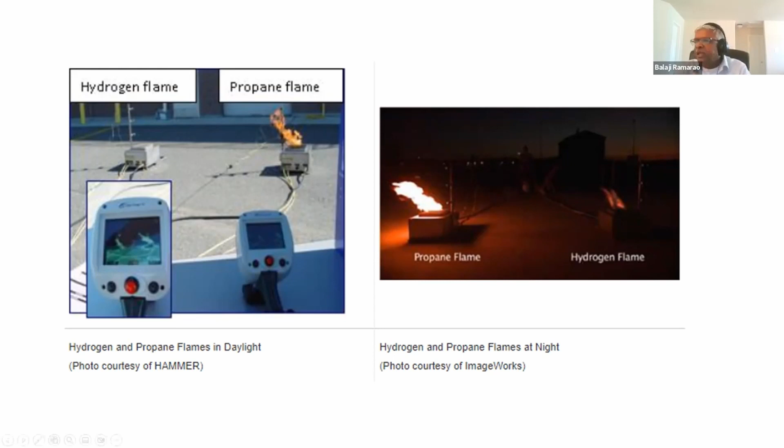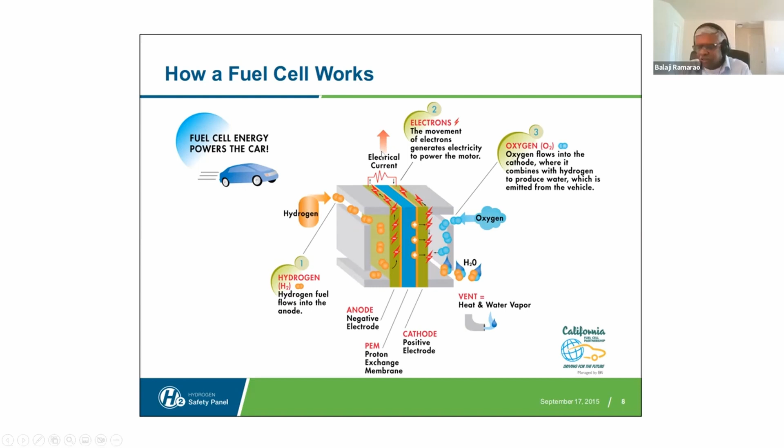I wanted to give an overview of how the fuel cell works for all these hydrogen cars, hydrogen trucks and others. Basically, you have the cell here, you send hydrogen, it combines with oxygen, and you have water. This is the type with the proton exchange membrane, and you generate power between the anodes and the cathodes. Then it converts, and you have the electrical current. Just wanted to give some basics on the fuel cell.

The traditional source of hydrogen was the refineries, because refineries need a lot of hydrogen for processing, especially if they have sulfur compounds. They hydrogenate them, convert that to hydrogen sulfide, and clean those fuels. Then you have the other ones, which are coal and also nuclear.

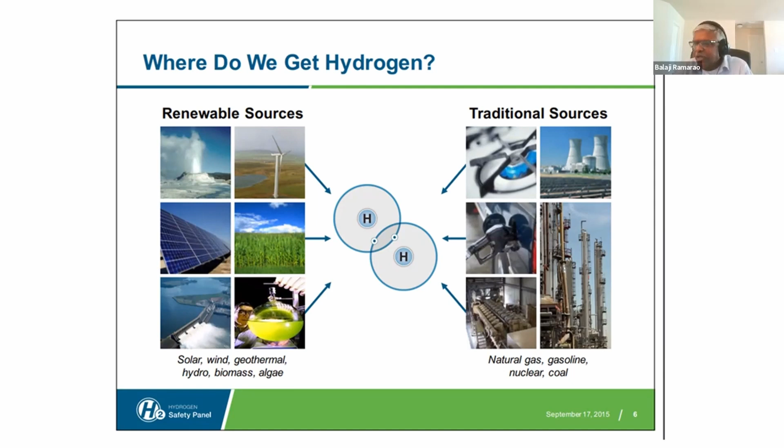So you might have to do some sort of intermittent process, so it may not be continuous. Whereas if you look at the nuclear part, it would be a continuous one, and that actually provides more of a rigid power supply. You can see.

All this information I got from the Hydrogen Safety Panel. It's a really good site where it provides you a lot more information.

So we talked about all the sources in the previous slide, and the applications part is what I wanted to say. I talked about the fuel cells. Then it can also be used for engines and turbines.

One thing is there is a lot of work being done to intermittently mix hydrogen with natural gas, and what they call it is blending. I think the blending is getting accomplished at 5 to 10%. In fact, in Canada, as well as in the UK, they have also done a sort of town distribution where they blended hydrogen and it was used for domestic fuel, but only about a certain percentage, because beyond that you will have issues with the flame and other things, right?

So just wanted to give that. And then also for engines and turbines, there is a lot of work being done to blend hydrogen. So that way, when you try to convert hydrogen and use it, the blending will become a sort of source intermittently, but the methane reduction could be lower, because once you try to blend it, for example, if you do a 10% blending, your carbon emissions could be a reduction of overall 3%. But you can use the existing infrastructure. So that's why the blending part is becoming more useful.

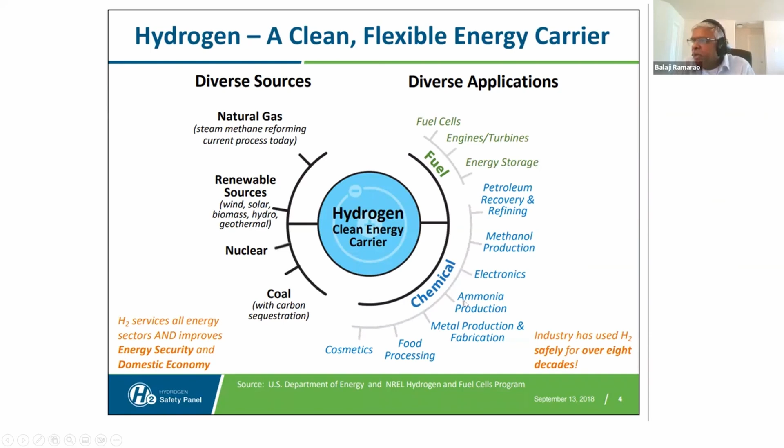So this is, I just wanted to give some sort of a pictorial view of where all it can be used. You can see that.

Okay, so power generation and grid balancing, that's the most important thing. And then you have transportation, which I talked about. Then the fuel for residential and commercial buildings, which is what I told about, some pilot projects where they're doing some blending, and feedstock.

One thing I wanted to say is, if you want to actually burn pure hydrogen, then you need equipment that is compatible, because when you try to burn hydrogen, there is going to be a higher flame speed. So you'll have to have equipment which will be able to contain that energy release, and it will be a custom design for 100% hydrogen.

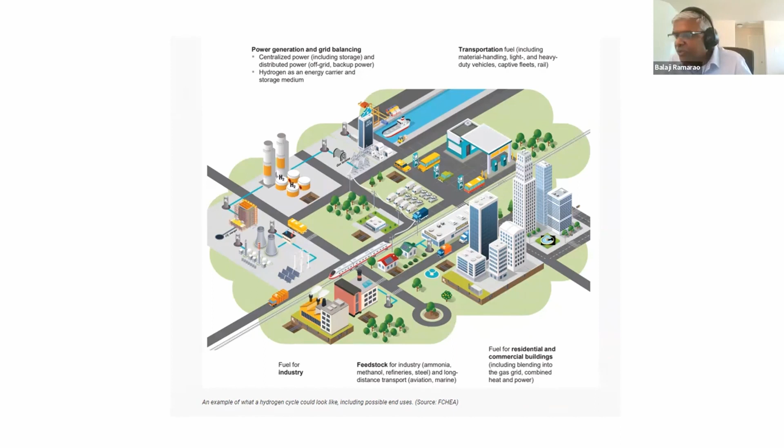And also wanted to just give some sort of supply chain information. So when you do hydrogen at the manufacturing facility, what you do is you compress it, and you'll have to transport it. So the transportation can be cylinders, normal cylinders, or a tube trailer, or it could be a pipeline. Through the pipeline, you can send it out and then to different distributions.

The other method is all these tube trailers and the pipeline, that becomes a sort of restriction because of the light molecular weight of hydrogen, right? It needs a tremendous amount, because you can only hold a certain weight of each. So it will not be a cost-effective solution.

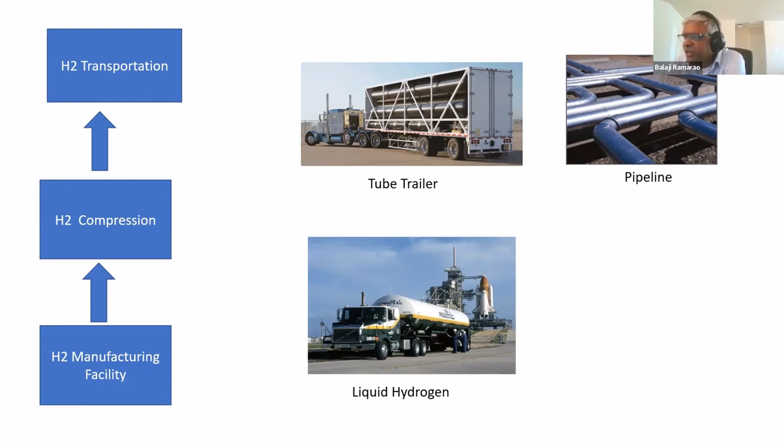So the other cost-effective solutions could be you have to liquefy hydrogen, and the liquefaction of hydrogen is not easy because it's about minus 423 degrees F. So you've got to liquefy that and then use that, transport it, so you can have the bulk containers, and then you can take that and vaporize it and use wherever it is possible.

The other method that everybody is looking for is, say for example, you want to get this hydrogen from, say, US to Europe. So you can probably take the liquid hydrogen and transport it, but the infrastructure becomes so difficult, just like the LNG. LNG is at least minus 260, right? Whereas hydrogen is minus 423. So there's going to be a lot of energy losses.

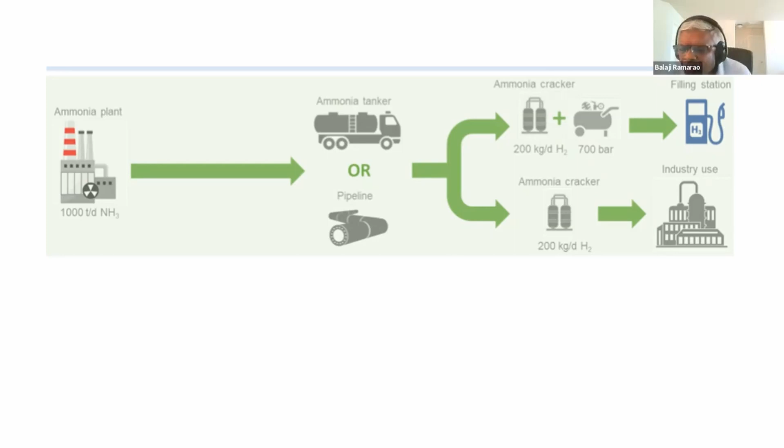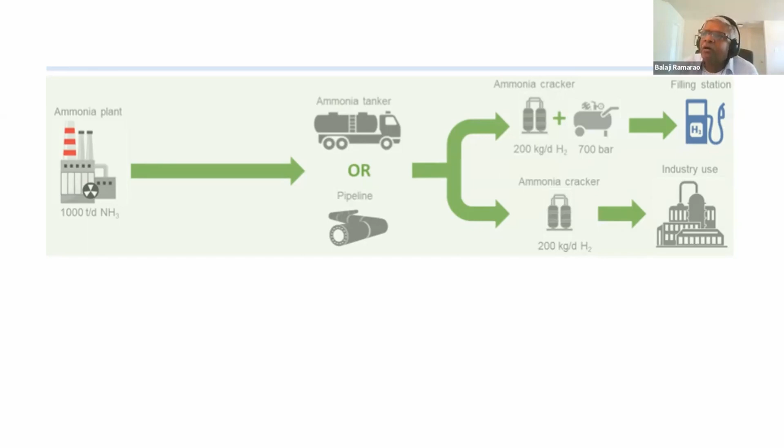So the other method is you can convert this to ammonia, and a lot of ammonia plants are already there for the fertilizer industry. But if you have a source like green hydrogen, and you convert that to ammonia, then you can easily transport it, in a tanker or a ship or whatever it is, and then you can take it to the user facility, and you can crack this ammonia, and the energy required becomes much lower. Then you can use that for different industrial sources. For example, if it is for the transportation sector, you need to go to the dispenser and you can get that, or if it's an industrial use, you can also do that. So ammonia cracking, this method is probably becoming more cost effective, and a lot of companies are looking at this option actually.

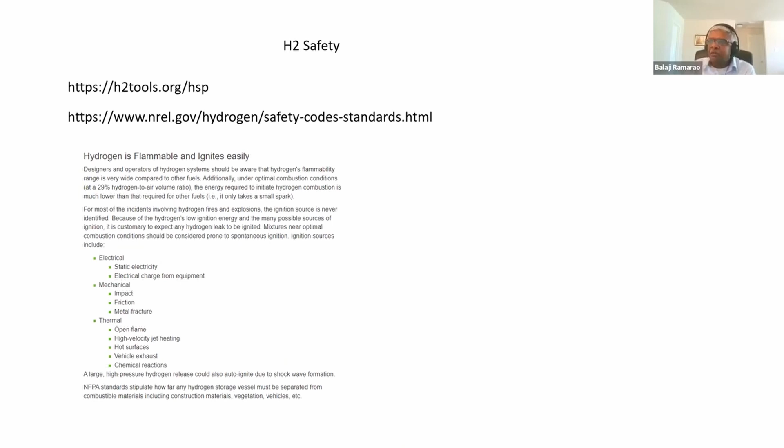I just wanted to highlight hydrogen safety, there's a lot of information available on the Hydrogen Tools website. You'll have to look at static electric charge, mechanical impact, hydrogen embrittlement, metal fractures, and other issues with hydrogen. I won't go into detail, but I wanted to give a flavor of the safety issues. The good thing is there are a lot of safety standards being developed. NFPA has already come up with NFPA 2 for hydrogen, and other safety standards are also being developed. It's not new, because it's been used for the last 80 years in the refinery industries, so it's just an extension and making everybody aware of it.

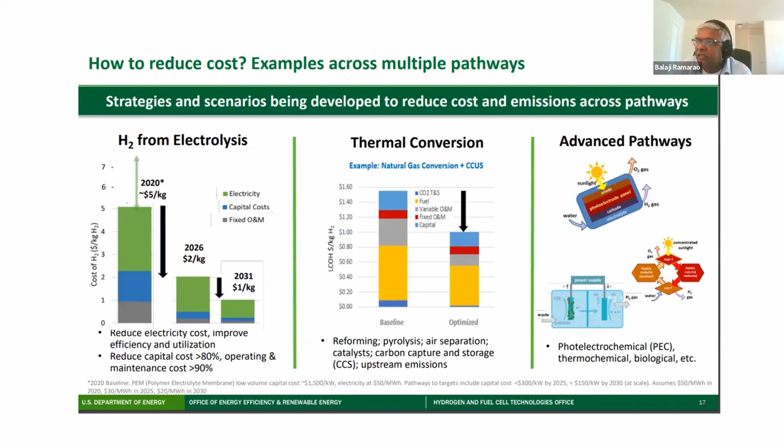So I think that's what I have, but I have a lot of backup slides. I wanted to take some questions so that I can answer them.

Excellent. Does anyone have questions? Because I do - let me check. I see Alan has his hand up. Would you like to go ahead and go, Alan?

Yes, you mentioned something about the high cost of renewable energy, if I understood you correctly. So one of the issues in California, and probably other places, is curtailment. Solar is the predominant renewable energy there, but there's actually more solar than can be used now. So the curtailed energy is essentially free. However, the capital cost of electrolysis means you can only use it part of the day if you're relying on free energy. There are all these trade-offs I can't work out in my head, but I wondered if anybody has studied that in particular.

Yeah, whenever you try to get electrolyzers built, you're absolutely right. Say for example, if they have to take some sort of power sharing on the grid, they could produce wind or solar and take the credits. You can do that, but the problem is the stability of the grid, and you also don't want to disrupt other commercial uses for the power. That's one of the areas you have to look carefully at how you're going to operate it. And as you rightly said, even if there's capacity available, you may not be able to continuously operate the electrolyzers all day. One of the things they look at is adding hydrogen fuel cells to help balance the power in the grid. That's why the nuclear option becomes much better for reliability of power.

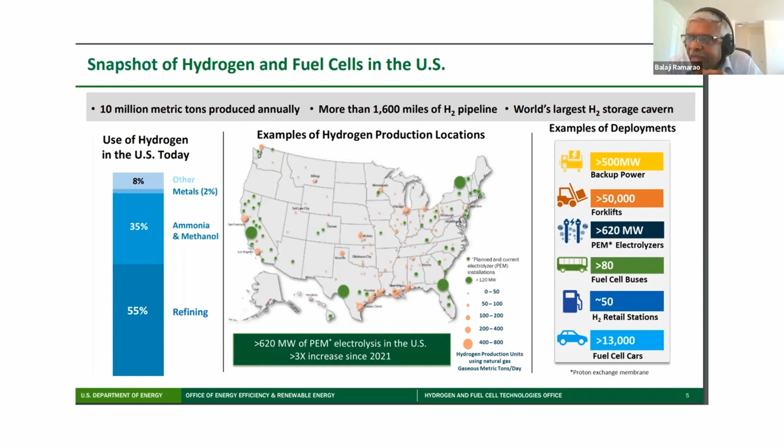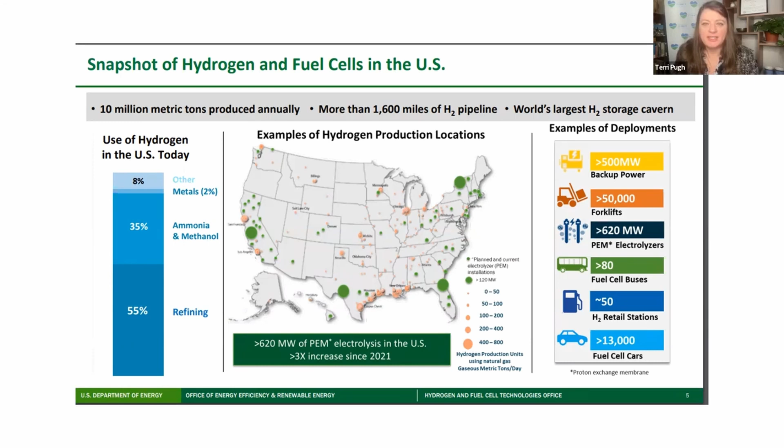Yeah. It's interesting because after Balaji talked to me about this, I started seeing hydrogen happening everywhere, just like he said it would. And up here in Washington State, there was actually a flight that was a hydrogen flight, and they described the large tank behind the pilot. Yeah, and that fits in with what you just said.

That's correct. And you can see one of these slides I have - say for example, you have a 150 horsepower car, it consumes about 3/4 of a kg of hydrogen for 100 km. And if you look at the gasoline, you can see how much you need. So this is just for a comparison, I have this here.

And moreover, you need also the infrastructure for the hydrogen, right, for dispensing. And so I think in California, they already have a lot of hydrogen dispensing areas, which means in order to have that hydrogen dispenser, you need to have facilities. Either you have compressed hydrogen, which you bring in, or you do local production using an electrolyzer.

So there are some methods, or you take the liquid hydrogen and then you vaporize it and then use that hydrogen. But you also need good compression, because these are high pressures, and it's a light gas. So those are the infrastructure needed. Yeah.

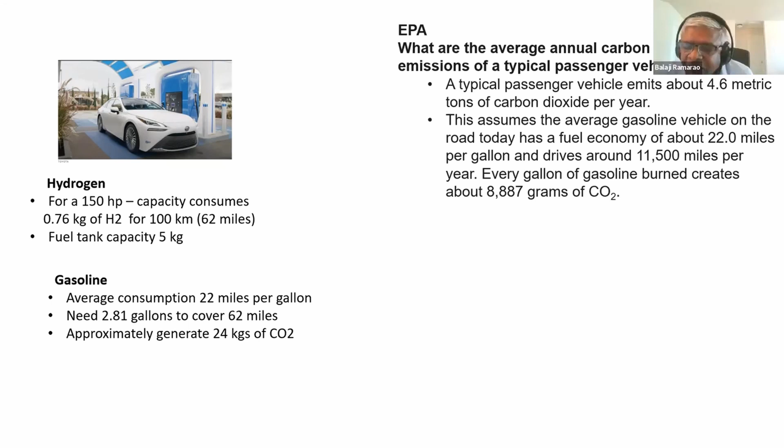Hydrogen has a much smaller molecule size than natural gas. Now natural gas is known to leak way too much from pipelines and so on. Is that going to be a big problem with hydrogen? And a follow-up question: if it does leak, is there any other thing that we need to worry about once it gets out? Yeah, I think you're absolutely right.

That's the area to look at for safety and others. Say, for example, if you have a conventional natural gas pipeline and you want to mix hydrogen and transport it, there are a lot of things you need to see. As you said, it's a very light molecule, so one is the embrittlement issue. The other one is all the normal valves, where there are a lot of fugitive emissions coming up. So you've got to have a compatible valve system for hydrogen service, with nil fugitive emissions. Those are all the areas which need to be looked at.

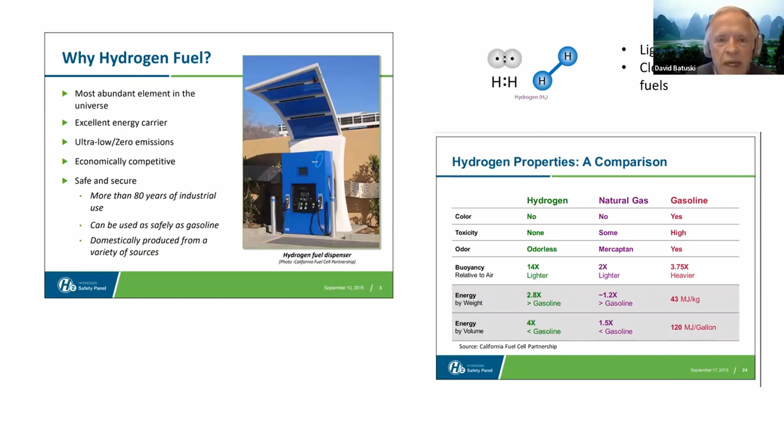I just wanted to bring up the hydrogen rainbow, the colors. I was reading an article in Science titled Hidden Hydrogen, about all the hydrogen seeping out of the earth in various places, saying there are lots of reservoirs available. And that is gold hydrogen, not taking any energy to create, but of course you have to manage it once you drill for it and extract it from the earth. I just wondered if you were aware of the work being done.

Yeah, I did read that article, and that's a very interesting article. Okay, thank you.

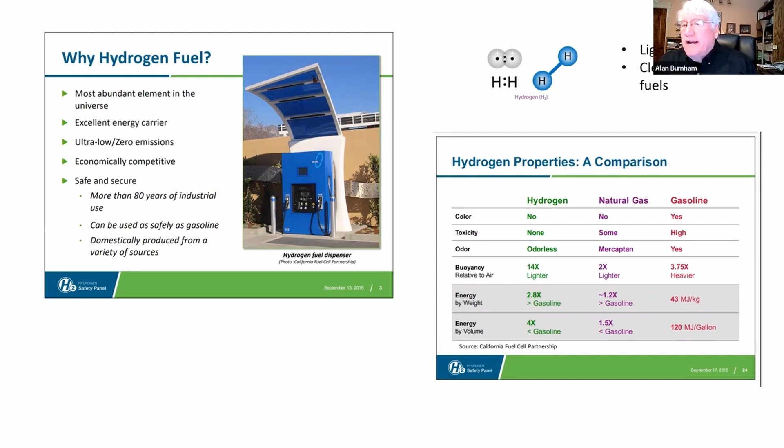About steam reforming to hydrogen, that's about 70% efficient, and a fuel cell is probably another 70%, so about 50% efficiency, which is still better than an internal combustion engine, but still not the way we should be going. The other thing I want to ask is about fueling stations. There are 150,000 fuel stations in the United States. Personal vehicles are most likely going to be electric; it's the large vehicles that will be hydrogen, so you may need a lot fewer of them. So what are the relative economics of on-site electrolysis versus larger scale electrolysis and transporting the hydrogen in tanks?

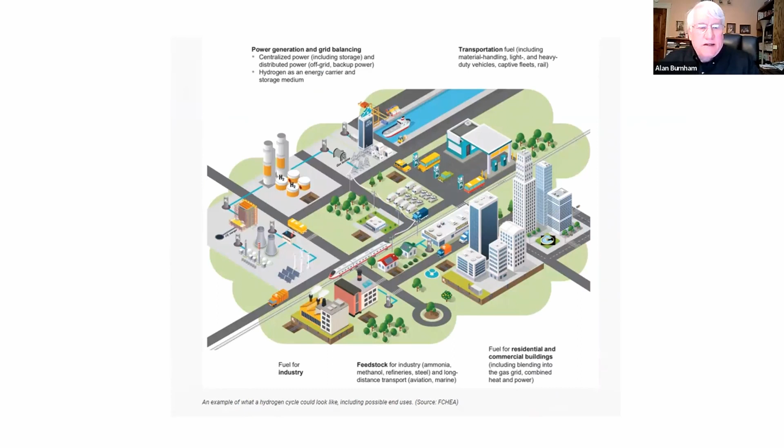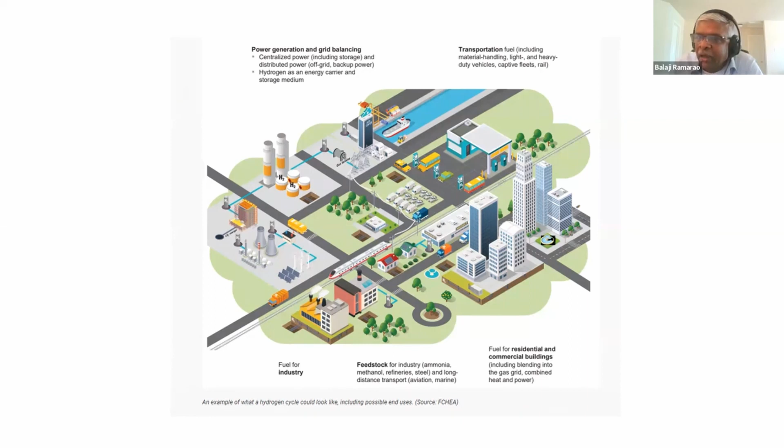I think that's more of a transport infrastructure and supply chain study which needs to be done. But just to give you an idea, this is one of the trucks or buses being used for the bigger ones, and those need like 50 or 70 kg of hydrogen, and to produce that you need good infrastructure. This could be a solution which changes regionally, is my view.

Sometimes you have liquid hydrogen available, and you can have vaporizers and use that. That's one solution. The other solution, if you have power, is the electrolysis option. A lot of work is being done on electrolysis at the moment, and they are targeting to reduce its cost, so that could be an intermittent solution also.